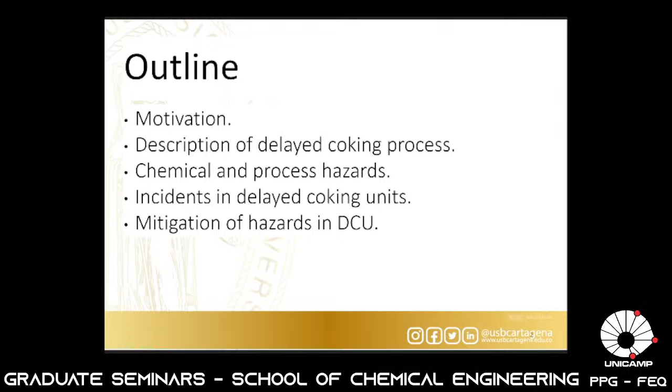The motivation that brought me to this topic is because my background in research has been related to the characterization and understanding of the behavior of heavy oil fractions, heavy crude oils, and also the need for a stronger safety culture in the industry.

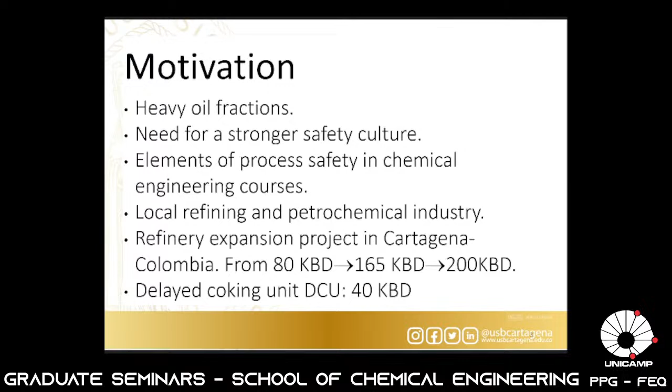Also, that we can include elements of process safety in our chemical engineering courses, and the location of our refinery and petrochemical industry here in Cartagena, which has undergone an expansion project that increased the capacity of this refinery to process from 80 kilobarrels per day to 165 and now to 200 kilobarrels per day. Now the delayed coking unit here has a capacity of 40 kilobarrels per day.

So that combined is what has motivated me to be in close relation with the people, the students, the workers who are at the refinery and who also attend our courses here at the university. They have been very helpful and motivating for this topic, considering the background in heavy crude oils, heavy oil fractions, and the interest in process safety.

Now I want to describe what delayed coking is. This is a thermal cracking process used in petroleum refineries to upgrade and convert petroleum residue, which is the vacuum tower bottom. This vacuum tower bottom stream is converted into liquid and gas products that leave behind a solid concentrated carbon material, which is called petroleum coke. As you can see in this slide, this process yields lighter fractions that can be processed to obtain higher value products.

Here in these pictures, you can observe that these delayed coking units are usually configured with two drums, which I will point out here. These are the drums where the coking takes place. And also, this is the cutting system—a very complex system of cranes and lines that allows cutting and breaking the coke after it has solidified here in the drums.

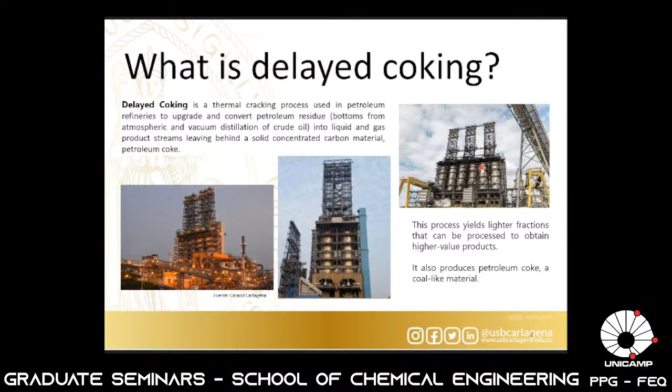These units are characterized because they always have two drums in each module. Here I am presenting this picture of the delayed coking unit in Cartagena. We have two modules, so in total we have four drums. There are refineries that have more than four drums; they can even have coking units with eight drums to process all these heavy crude oils and heavy oil fractions.

I also want to give context about where the feed to the delayed coking unit comes from. Here I am presenting this very simple scheme of the atmospheric distillation tower and the vacuum distillation tower.

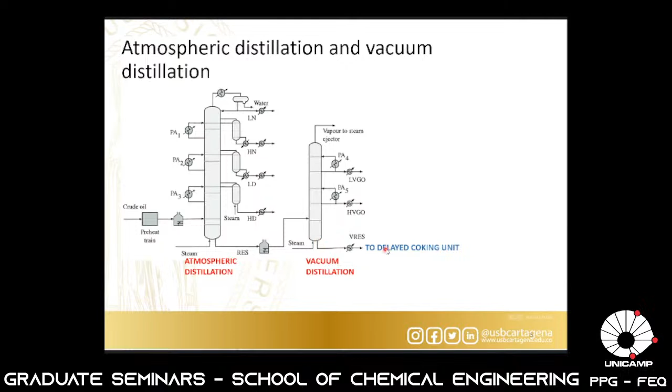When the crude that has been processed in the vacuum distillation tower is already fractionated, the residue goes to the delayed coking process. Here you can see where the fresh feed enters the bottom of the fractionation tower that corresponds to the delayed coking process.

From the bottom, it goes to a fired heater. You can see here the fired heater, it is a furnace. After the fired heater, this stream is sent to the coke drums, where it is fed from the bottom of each coke drum, but not at the same time. It is not a simultaneous feeding, it is alternately feeding for each of these coke drums.

Here in the coke drums, due to the heating in the heater, this stream reaches very high temperatures, let's say like 480 or 500 degrees C. The pressure at the coke drums, the overhead pressure, is about 15 to 35 psi gauge. Under these conditions, the cracking reactions proceed and lighter fractions are produced. These fractions are in the form of vapors that are then sent to a fractionation tower where we can separate this fraction into gases, gasoline, and gas oil.

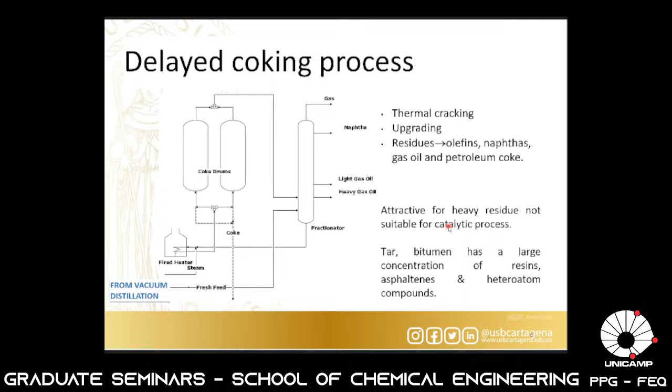Here in this video, I want to see if I am able to show this video. I don't know if I am okay. Well, in this video, let me see. Okay.

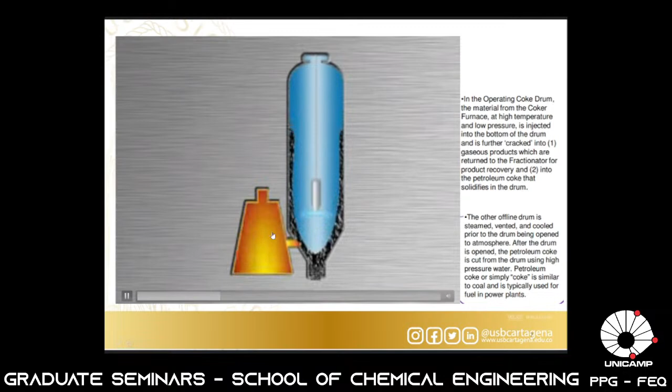In this video, you can see a very simple representation of the process. You will only see right now the furnace and one of the coking drums. You will see that this is a semi-continuous process. A continuous flow of material goes through the tube furnace, and then materials are fed alternately into the drums. While one drum is being filled with coke, the other drum is being stripped with steam. It is also vented and cooled before opening this drum to the atmosphere.

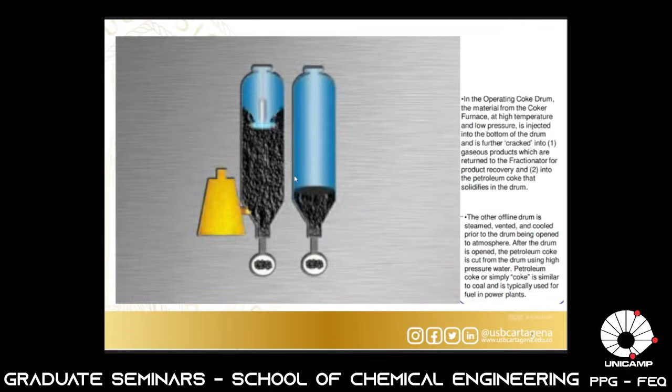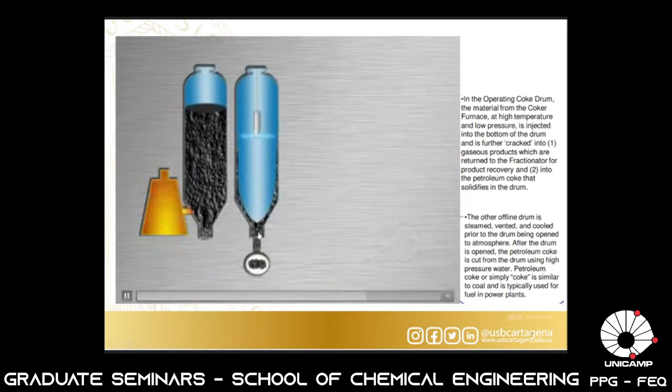After the drum is opened, you can see that in this video. The opening of the drum is usually called the unheading. Then you open the drum, you cut the coke with a water jet that can be observed in this video. That water jet has very high pressures. And then the coke is drained down to the coke pit.

The vapors that are separated in this coking process in each drum are sent to the fractionation tower, as I showed you before. But this illustration is better to understand this process and why it is called a semi-batch process or semi-continuous process.

The olefins and the products that you obtain in the fractionation column are more commercially valuable because they can be used in the petrochemical industry, in gasoline blends and naphthas. The coke can also be used in the aluminum industries, steel industries, and other chemical industries. One of the benefits of this process is the flexibility to handle heavy fractions.

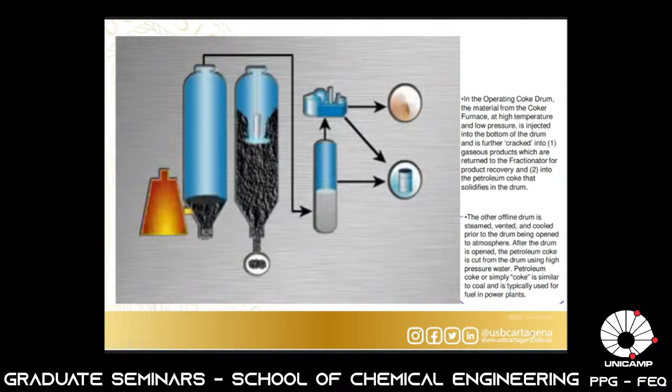Now I am going to this next slide, where there is another representation of a scheme of how this coking process works. You can see that there are tunnels formed in the solidified coke mass, so this steam can drag the vapors, the light vapors, to the fractionation column. This drum you can say is in the coking mode, while this other drum is in a different stage.

You can see this water jet represented here, and this water jet first perforates a hole along the mass of the coke that solidified in the drum. Then the jet is cutting the coke along all the walls inside the drum, and the coke is directed to the coke pit where it is collected, where it is drained, and the water is drained and recycled into this process.

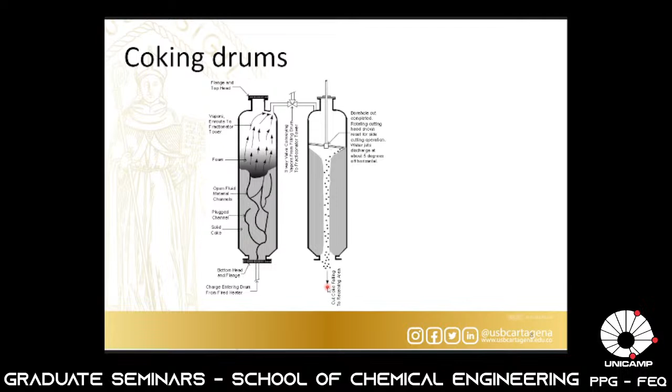Here is a very common list of the operations that are involved in the coking process. The coking process in the drums can run like a cycle for 16 hours. There are cycles that take longer, but this is a very typical way to list the different operations involved in the coking operations.

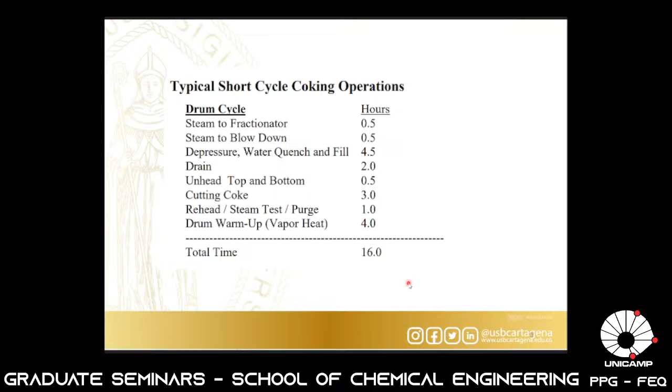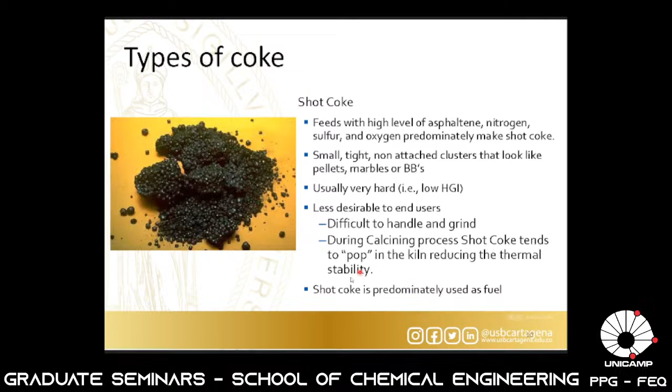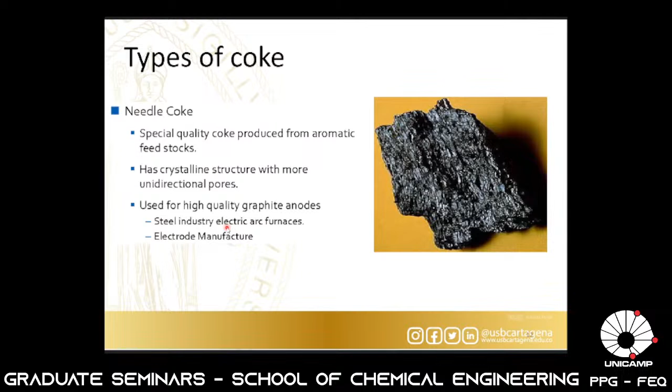The types of coke that you can obtain from this process are shot coke, which is not so desirable because it is too hard, difficult to handle, difficult to grind, and pops while burning in the kilns, reducing thermal stability. This can be used as a fuel, but it is not so desirable in the process. But sponge coke and needle coke are higher quality cokes that can be used in manufacturing electrodes.

Now, the central topic of this presentation is directed to the hazards in delayed coking units. I can mention here the chemical hazards and the process hazards.

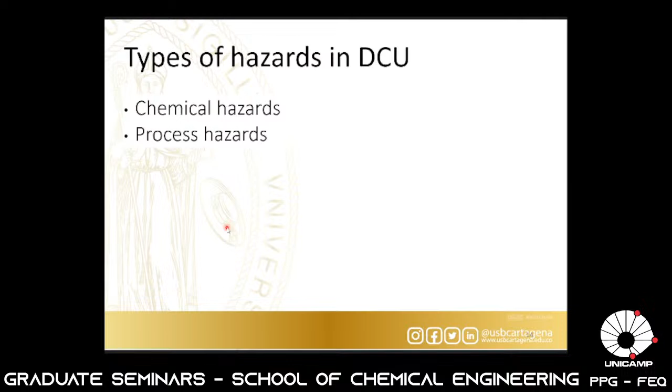About the chemical hazards, here I am showing a very simple table about the different substances present in this process. You can see that they can be irritant, they can affect the health of the personnel that operates the plant, and they are toxic.

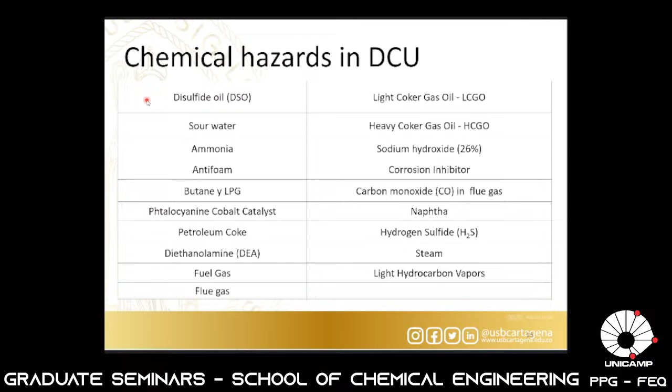So this is just to mention the chemical hazards in DCUs, and also here we are going with the process hazards in delayed coking units. It is common that the most frequent hazards are related to fires and explosions, and that is because many streams and deposits in this process contain flammable and combustible material.

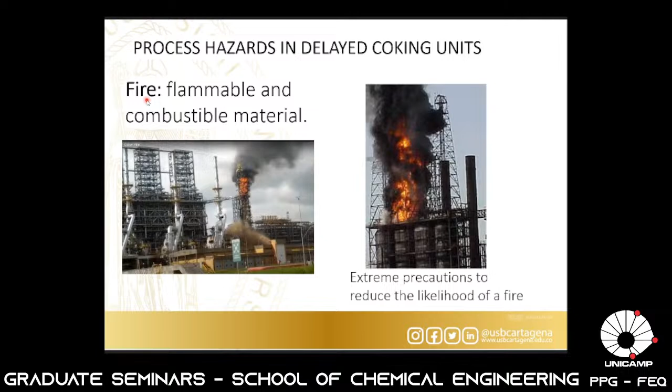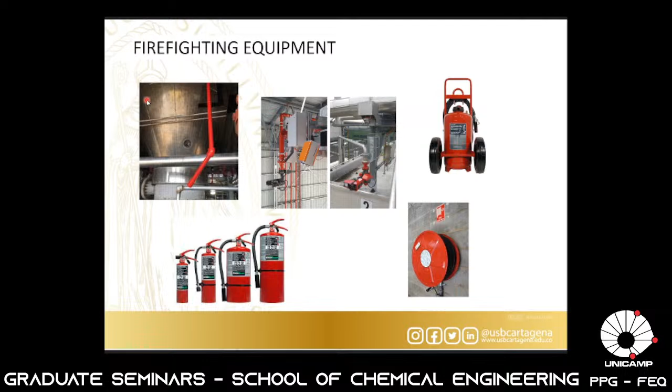So personnel must take extreme precautions to reduce the likelihood of a fire. We also must consider the fire suppression systems and firefighting equipment that must be located throughout the unit to extinguish the fire. Here are some examples - they are very common, like sprinklers, fire monitors, wheeled fire extinguishers, manual fire extinguishers, and so on.

And also the safety systems to avoid these fires are related to the installation of detection systems, relief valves, motor operated isolation valves, and interlocks.

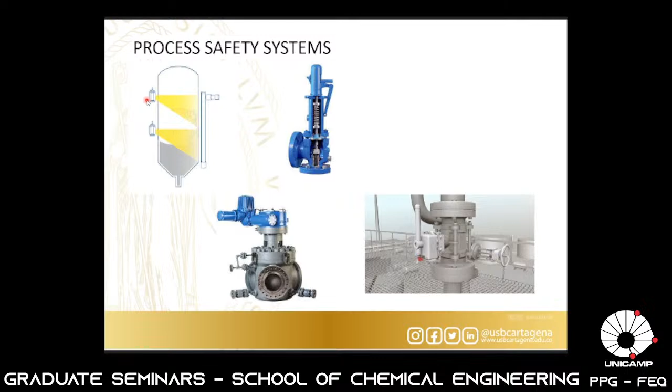Other hazards present in delayed coking units are hot process lines and equipment, the discharges and escapes of toxic substances during sampling procedures, and steam vents - because any vent of vapor, including steam traps, exhaust lines, or relief valves to the atmosphere, can cause injury to personnel. So unit personnel must be aware of the specific hazards posed by vapor vents and their locations.

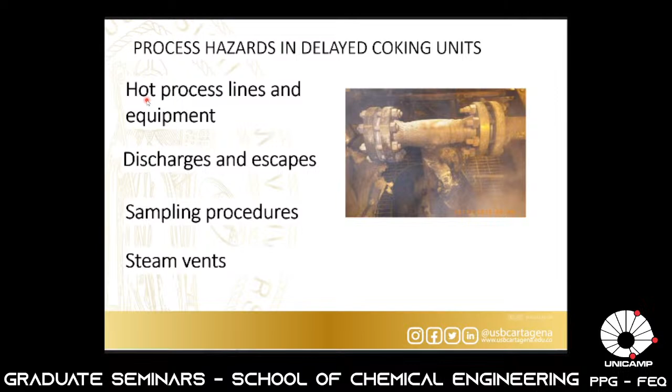Now I want to mention some of the incidents, accidents, fires and explosions that have taken place in delayed coking units. This presentation is a description and a reminder of conditions that can cause critical scenarios that develop into fires, explosions, and fatalities.

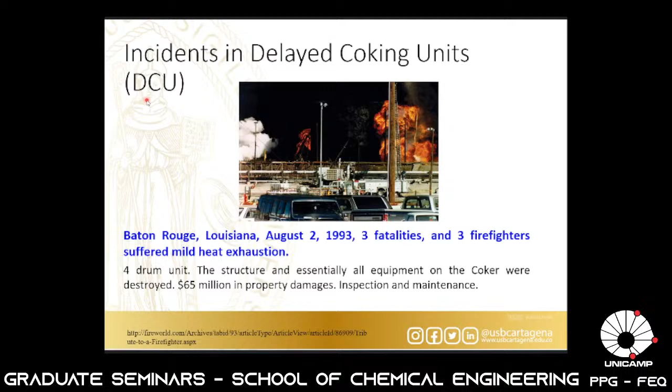Here, this incident in Baton Rouge, Louisiana, 1993 - three persons were killed, three firefighters were affected, all the structure was destroyed, and a lot of money in damages was involved. It was attributed to a faulty inspection.

In this case, what was found is that one of the main causes was the failure of an elbow in the feed circuit, which is exposed to very high temperatures. The elbow was made of carbon steel and was installed in 1963. The fire and explosion occurred in 1993.

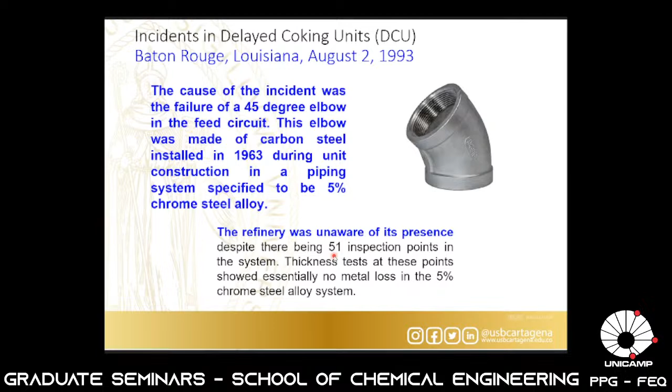It was 30 years the refinery didn't know that this elbow with mismatched metallurgy was placed in that critical part of the plant. The metallurgy required for these conditions was a 5% chrome steel alloy. So even though the refinery had enough inspection points - they mentioned 51 inspection points - they were not aware of the presence of this faulty elbow.

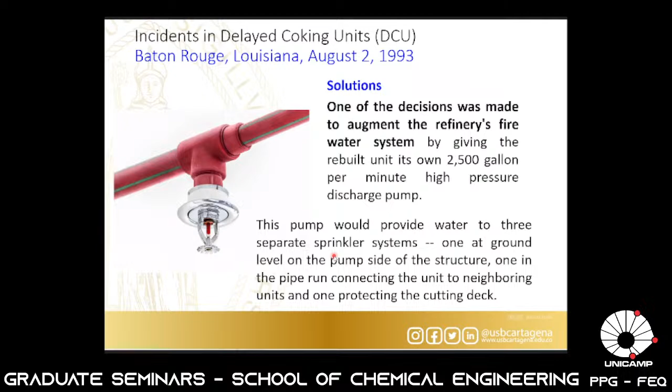So the decisions the company made were to build a more robust fire water system with a pump specific for this coking plant. Other solutions were to make easier egress for workers. If workers are located at high levels like the cutting deck or top head of the drums, it is difficult for them to egress to get away from fires.

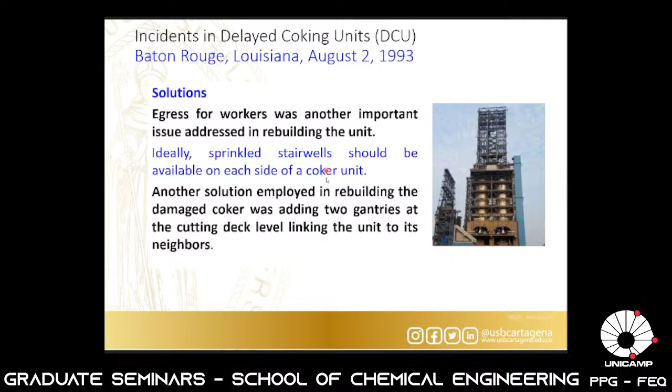So ideally, sprinkled stairwells should be available in this coker unit. Another solution was adding two gantries so workers could egress very easily. Among the lessons learned: the high degree of inspection required to be confident about materials and specifications, to be sure about the identification of materials, and also to consider that there are portable materials identification systems and equipment that can be used in these cases.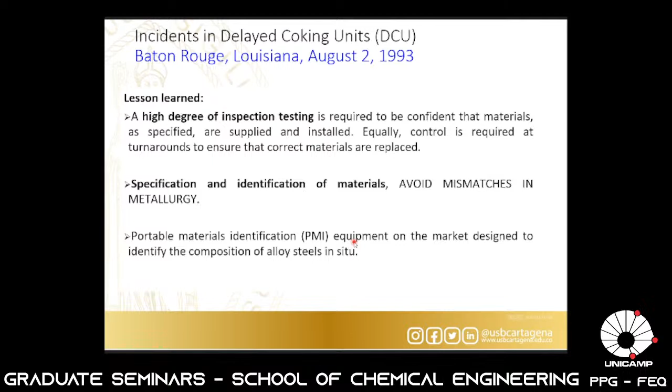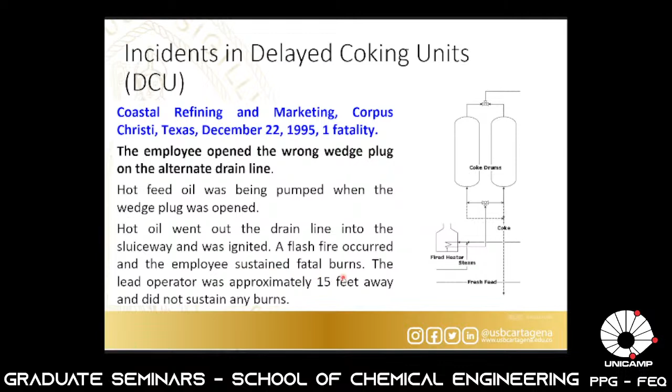Another accident in Corpus Christi in 1995 caused one fatality. What happened is that the fired heater was sending hot material to the coke drums. In this system, the drain line is shared between the drums. It is only one drain line, and the operator unintentionally opened the feed while this drum was coking, draining hot coke. Hot oil went down the drain, causing a flash fire, and the employee sustained fatal burns. The other employee was not affected.

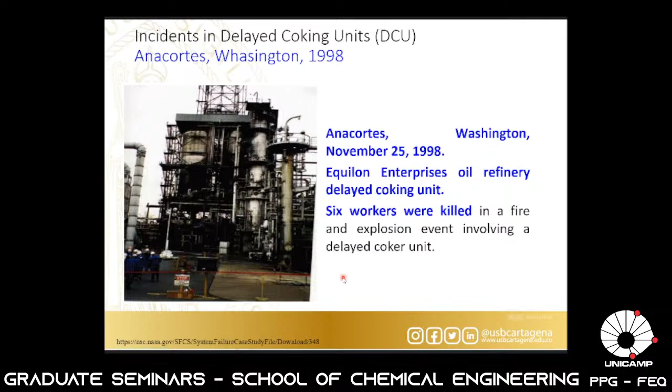A very highlighted accident in delayed coking units is the one from Anacortes, Washington, in 1998. In this accident, six workers were killed in a fire and explosion event in a delayed coker unit.

Here I'm showing what happened once the refinery stopped all operations due to a power outage, caused by high winds from a storm. The refinery stopped everything, and one of the drums in the delayed coking unit stopped functioning. The lines started clogging, solidifying with material that should be fluid, but once the plant went down, it started solidifying in the lines. Also, some of the coke partially filling the drum started to solidify.

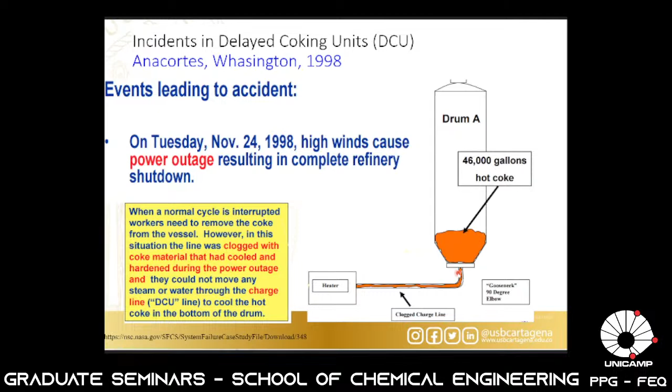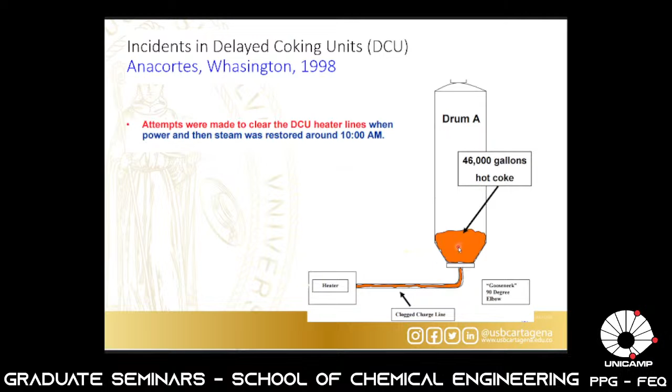When a normal cycle is interrupted like this, the procedure is to remove the coke. But since the lines were clogged, it was difficult to make this removal. The employees made several attempts to unclog the lines and break up the coke, but it was not possible. So they decided to open the top head of the drum. They based this decision on temperature sensors located at the top, at the skin, and at the bottom, and they considered that the temperature of the drum's contents was at a safe level, not dangerous to handle.

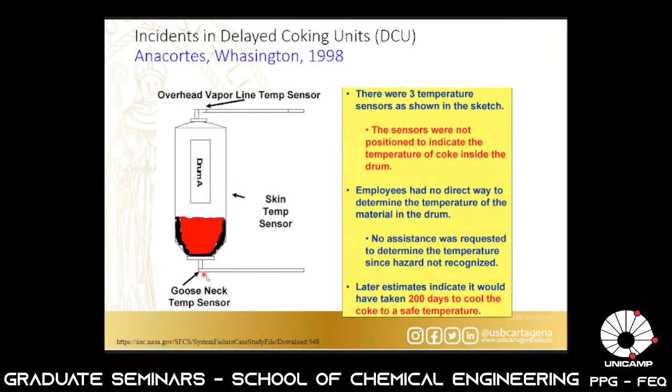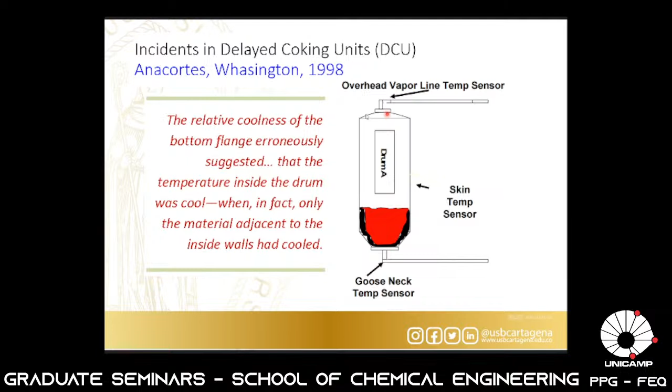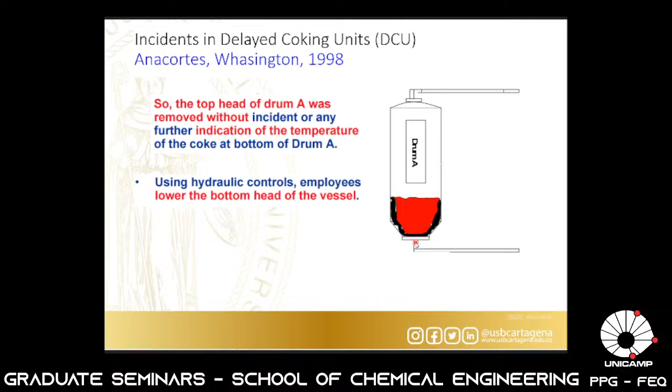But they didn't verify the real temperature of the contents. They didn't know that only the coke in contact with the internal wall of the drum had cooled a little. So they decided to open the bottom head, as that is the procedure. Once they started opening it, an avalanche of hot, unsolidified coke affected and killed six workers supervising the operation. The coke started a fire, and the workers got burned in this accident.

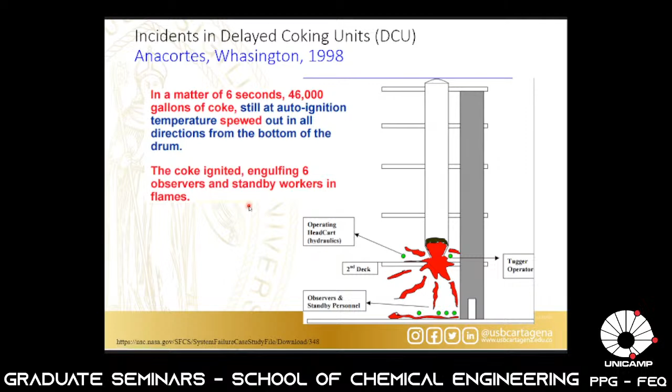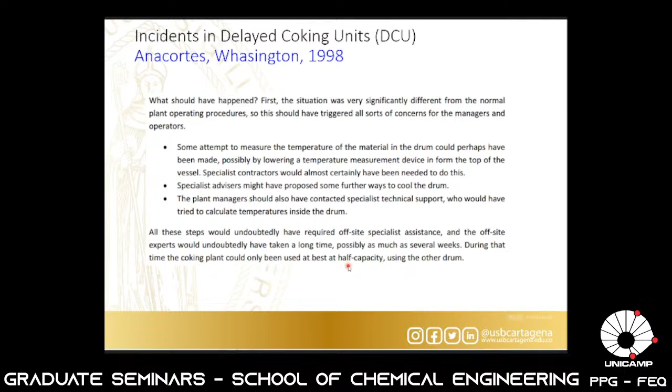The analysis after this catastrophe produced lessons learned. Some attempt to measure the temperature of the material in the drum could perhaps have been made. They could have lowered a temperature device from the top of the vessel, but this would need specialist contractors, and technical support would take time. Under these conditions, the drums and the delayed coking unit could only be used at half capacity. But what they decided was not safe. They were not aware of the true temperature of the drum's contents, even though they had left it about one day to cool down.

The faulty factors that characterize this accident include the permit system, which was flawed—it was falsely determined that drum parameters were safe for unheading. The procedural development was faulty. Operator training showed that operators did not know the true hazards of these processes. And management of change should have been applied, since the coking unit was operating in abnormal conditions at that time.

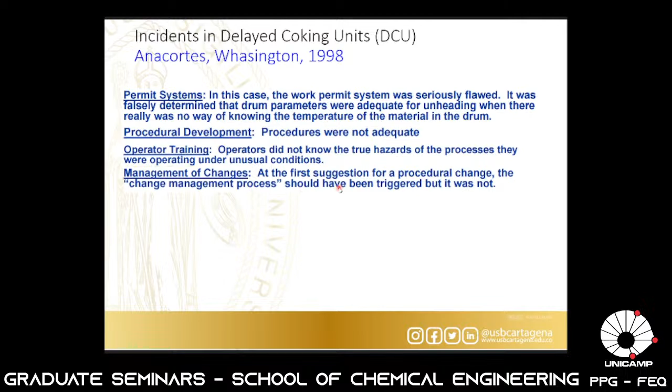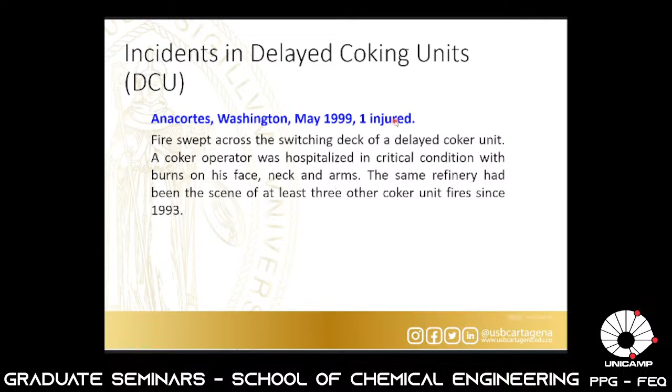After this accident where six workers were killed, in the same refinery and the same delayed coking unit, one person was injured the following year, in 1999.

Based on these repeated accidents and their repeated causes, OSHA and EPA issued a safety bulletin, the Chemical Safety Alert, mentioning all the hazards involved in coking processes and suggestions for mitigating these hazards.

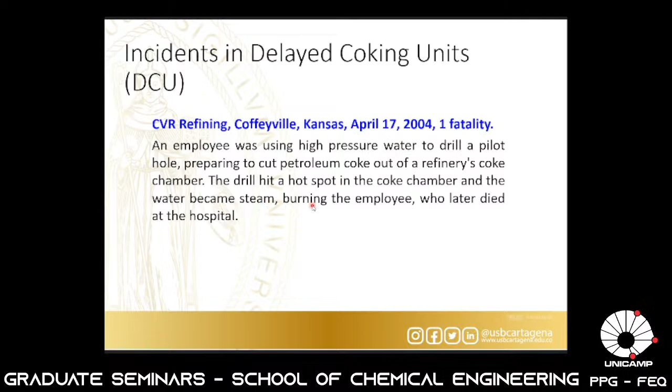But even after this bulletin was issued, accidents kept happening. In 2004, there was one fatality, because the employee was using high pressure water to drill a hole in the solid coke. The drill hit a hot spot in the coke chamber, the water turned to steam, and it burned the employee, who later died at the hospital.

Also in 2005 and in 2009, we can see that there has been a sequence of accidents.

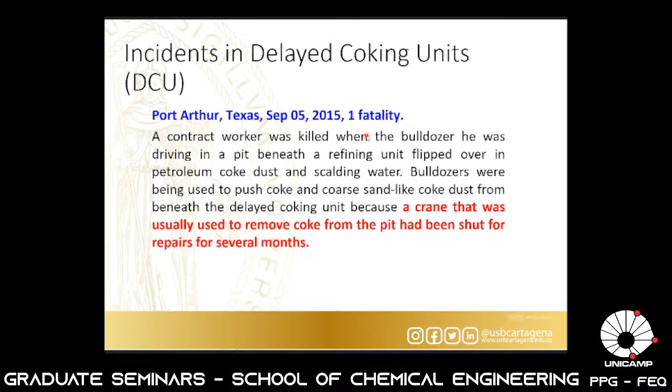Maybe they are different, but some of them share the same causes, here in Port Arthur, Texas in 2015. And here there are also other accidents that I found randomly searching on the internet.

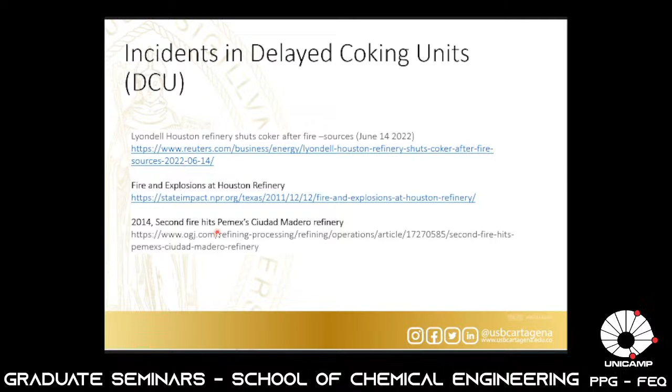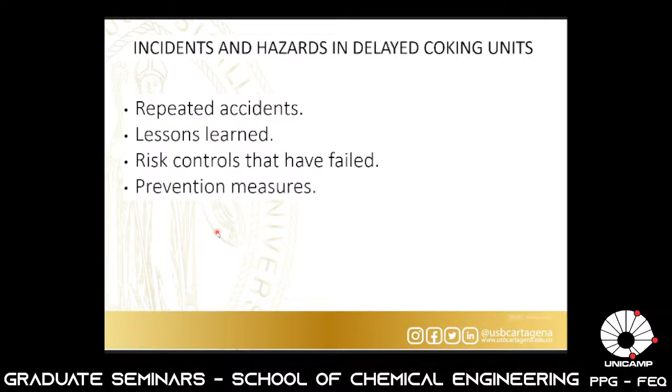So, considering these repeated accidents, the lessons learned, and the risk controls that have failed, it is necessary to establish some prevention measures. Here I found some very interesting presentations in conferences about chemical engineering and process safety.

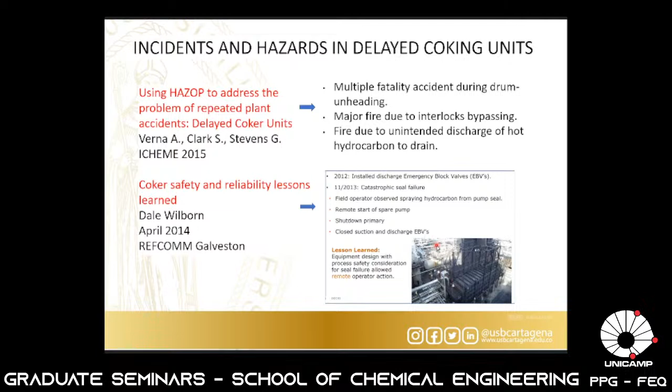One of the factors that characterizes this delayed cokers unit is the manpower intensity, since there are more than 20 operations involved in this process where people have to be exposed to toxic vapor, toxic substances, and high temperatures. Each unit has like 4 or 6 drums, as I showed you earlier in pictures.

These tasks are also performed at several levels of the coking structure, which is really high. You can see that some points are like 40 meters from the ground. So these high height tasks are really dangerous.

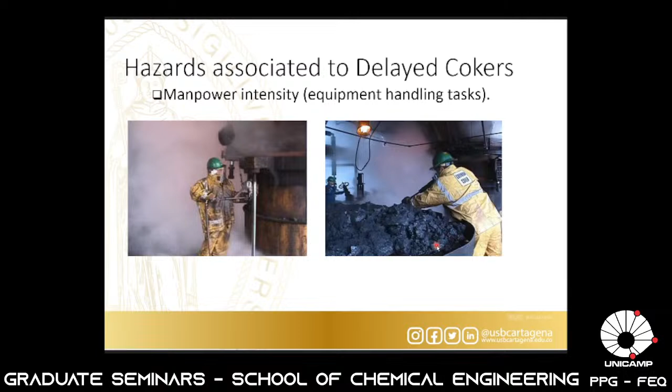Also, during these operations of coke drum switching, when you are changing the feed from one drum to the other, you need to close valves, and then you need to be sure which valves you are going to open or to close.

This can be confusing in some cases, but the mitigation, the suggestion to avoid this hazard, is to install automatic valves for the unheading and also for blocking some streams.

Some facts that can happen here during coke drum switching or during coke drum head removal are the eruption of geysers, because hot steam just goes up and can heat and burn the workers. Also, hot tar ball ejections from the drain line, undrained water release, and shot coke avalanche.

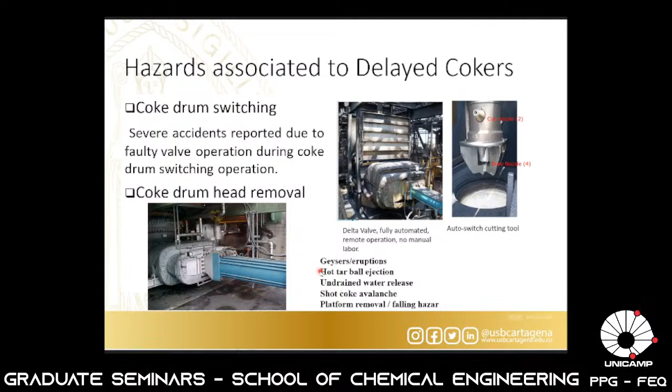Also, during platform removal, the falling hazard exists for the workers.

Now, these are other hazards that are present during coke cutting operations. For example, this cutting tool, if it is raised and the water jet is still streaming, it could dismember an operator. So it is important to isolate this tool while it is going up.

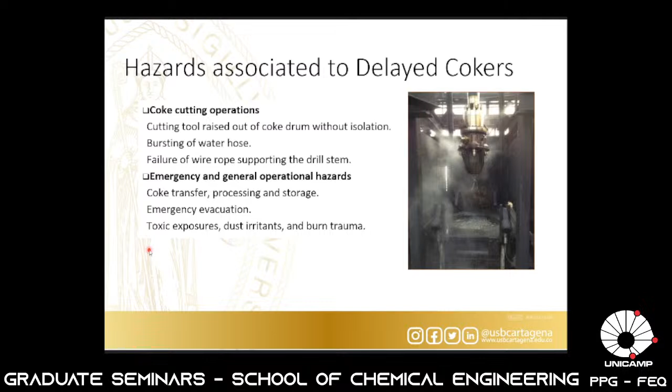And there are also other emergency and general operational hazards during coke transfer, processing, and storage, the emergency evacuation, as I mentioned in the accidents that happened in these plants.

So here are some suggestions for mitigation of these hazards: to operate remotely the systems that open and close these drums on their top and bottom, and to use color coding of valves to avoid faulty operation.

The employees should always be in company, they should be in pairs in case an emergency arises, and also there are some suggestions for mitigation of hazards during coke drum head removal and coke cutting.

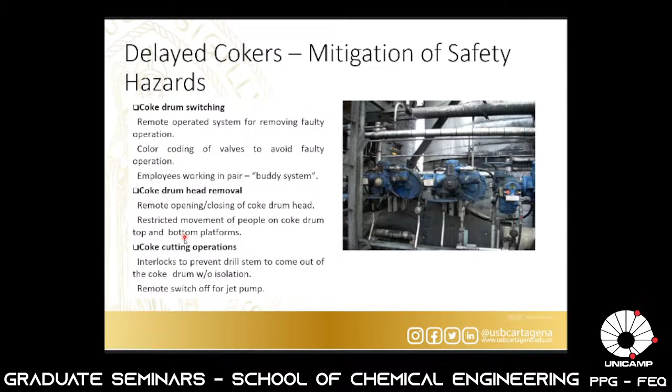Also, it is important that during these operations of opening the drums, you have to establish restricted areas, to try to avoid workers getting close to these areas where the coke drum is opened.

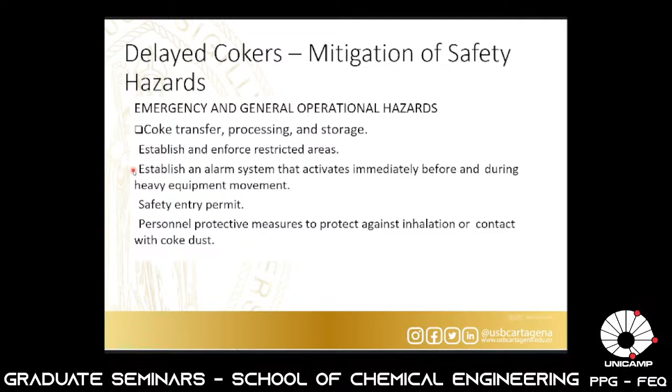In conclusion, what will help reduce the frequency and severity of these incidents is continuously evaluating these hazardous conditions. You can use HAZOP to identify these hazards, modifying operations to control them.

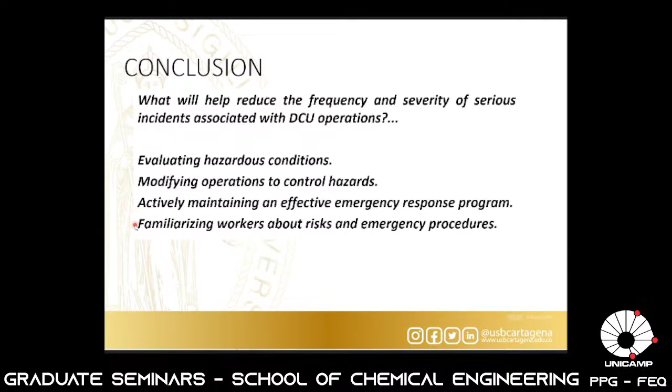Modifications for the process to install automatic valves to operate them remotely, also actively maintaining an effective emergency response program and training workers about the risks and emergency procedures.